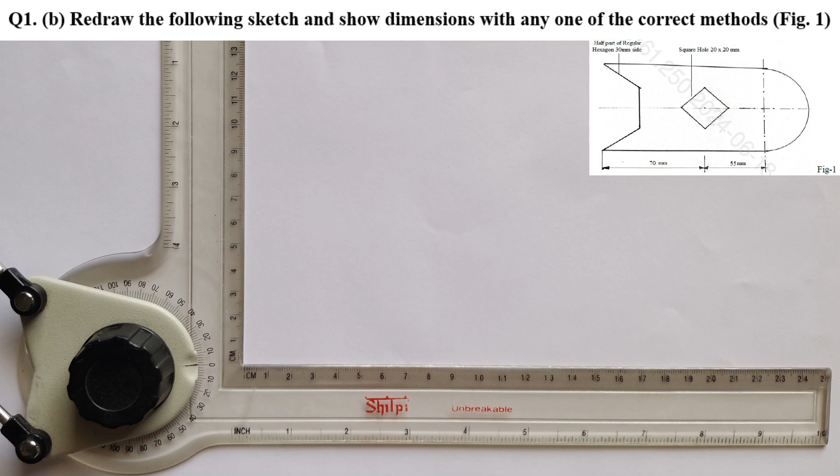Starting with the first center line, taking a vertical projector here. If we use the circle method to draw the hexagon, the radius of the circle is equal to the given side. In our case, it's 30 mm.

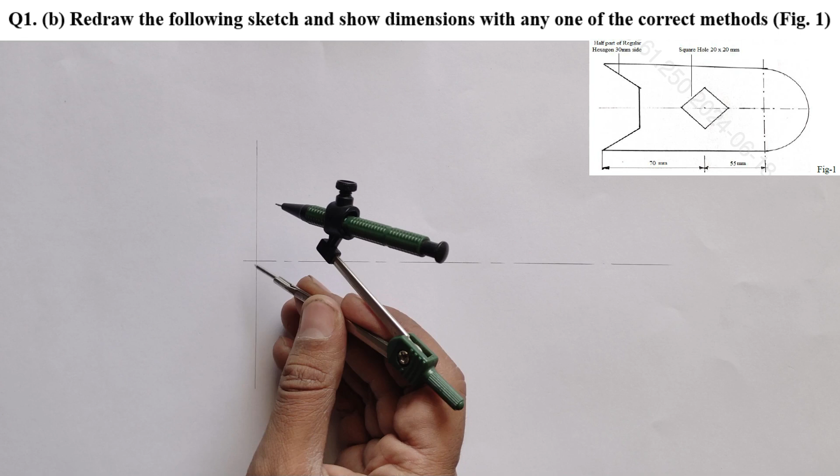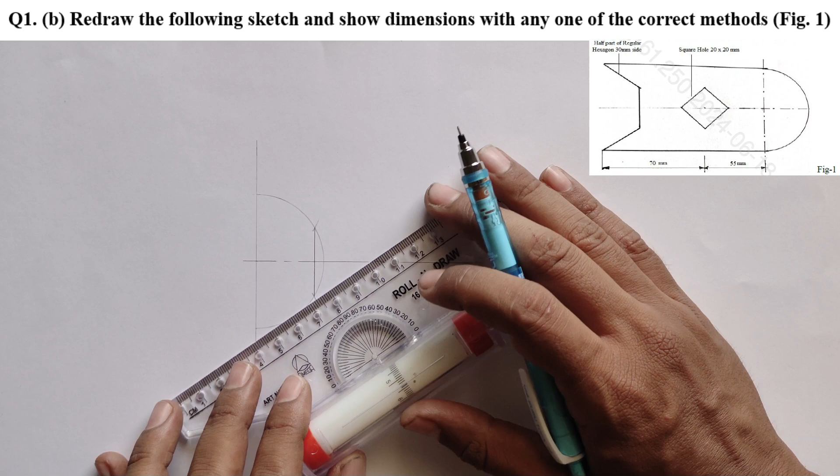I have used a semicircle because we have to draw only 3 sides. Now keeping the compass here without changing any radius, cutting an arc. This completes the 3 sides.

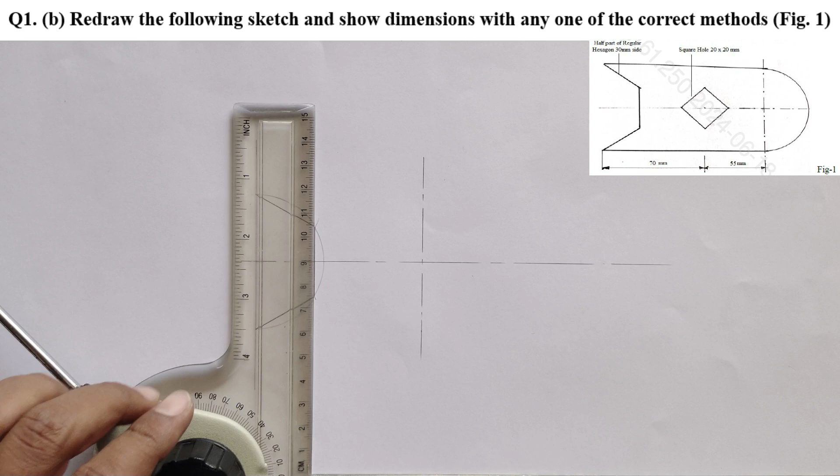From this end, you have to take 70 mm. At this location, you have the square hole. From here, again, you have to move 55 mm forward.

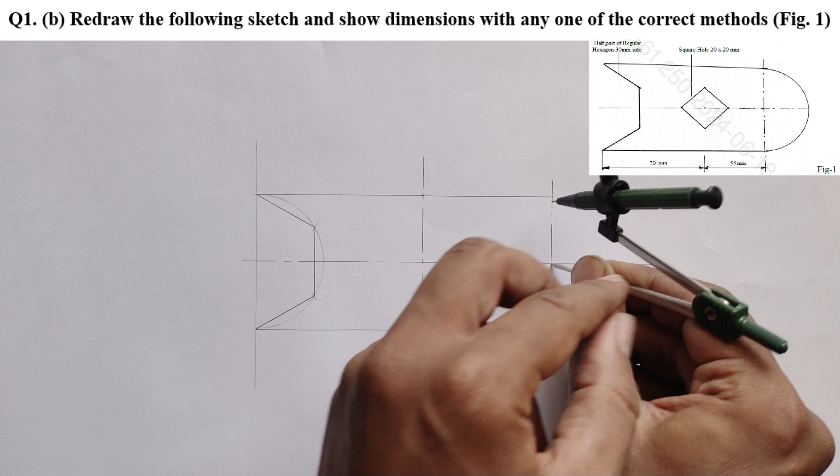Let's draw the semicircle first. Now, this square. The side of the square is given 20 mm and it is placed diagonally. In order to place it diagonally, draw a 20 mm by 20 mm square separately.

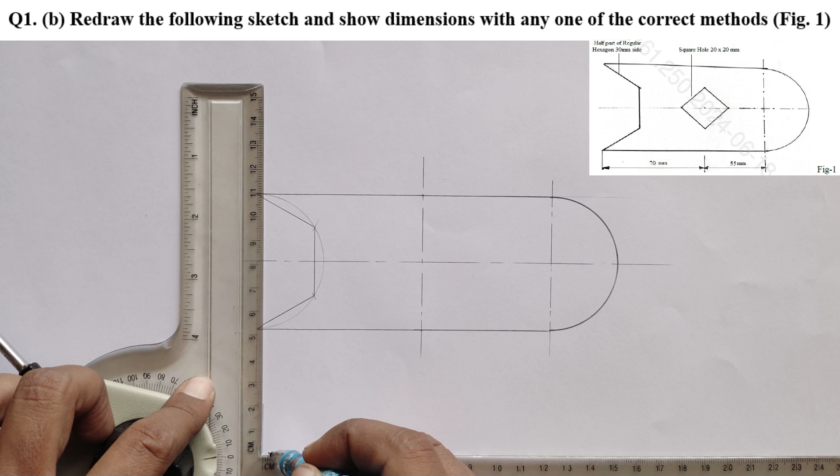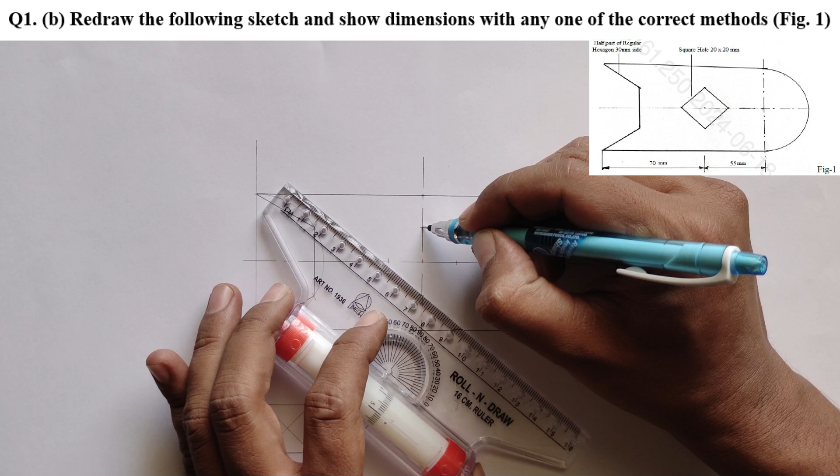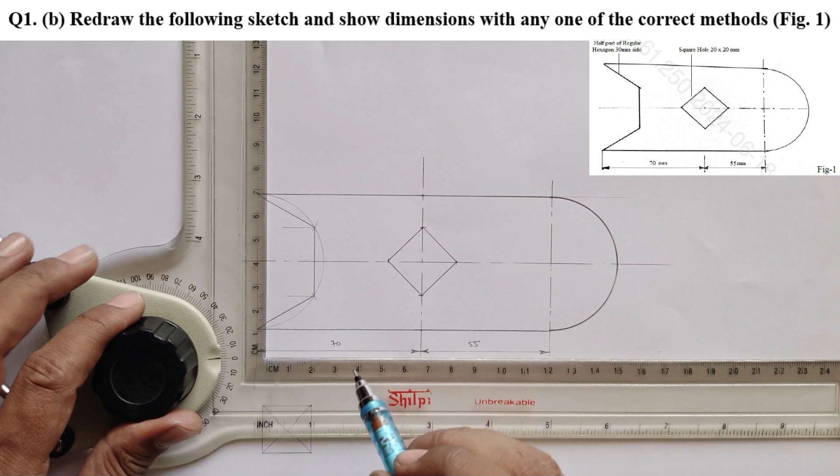Now take half of this diagonal. The dimensions. This completes the solution.